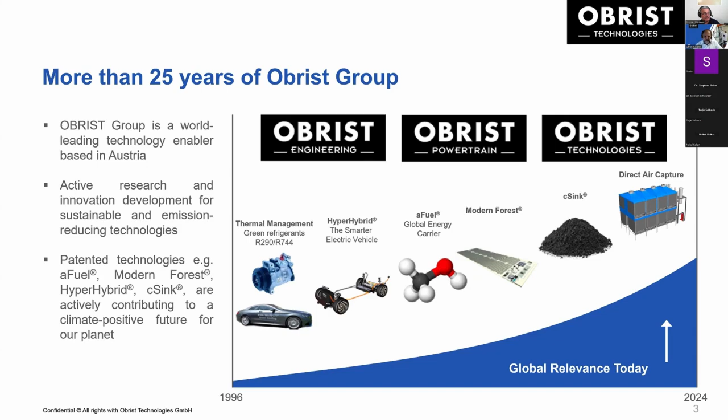There are, of course, numerous activities from the UN and all over the world in different countries to reduce or to get to a CO2 neutral level by 2050. And this will be an extreme effort for everybody around the world. We as Obrist think that this is actually not enough and we have to go further. And we have even to reduce the concentration of CO2 in the atmosphere by or after 2050.

The following technology, which is direct air capture, which this webinar is all about, is one of the building blocks where we think we can reach that ambitious goal. And I'm happy to hand over to Chris Meusberger to explain to you how we want to do that.

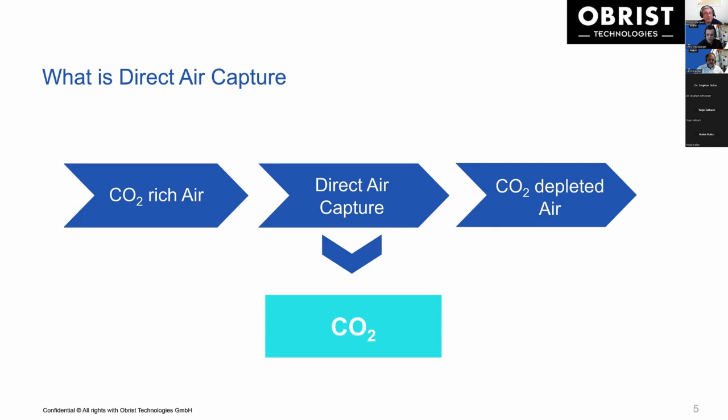To solve this challenge, there are, of course, multiple approaches, with each and every one of them having their own strengths and weaknesses. The most common classifications are through the type of process being used, as well as how the CO2 is released from the process. One can differentiate, for example, between chemisorption and physisorption processes, or adsorption and absorption. Process type also sometimes refers to the type of sorption material being used, for example, a liquid material versus a solid one.

With regards to the release of CO2, one can release this from the used sorbent material through different ways as well, depending on the process. For example, through heating up the sorbent material, which would be called a temperature swing, or creating a vacuum around the sorbent, which is equivalently called a pressure swing.

Finally, other aspects such as the application of the CO2 product, so whether the CO2 is used in a product or stored subsequently, further the condition of the CO2, especially regarding purity and/or water content, and then finally also the type of energy being used, so thermal or electrical energy. All of these are also sometimes mentioned to differentiate between various direct air capture technologies.

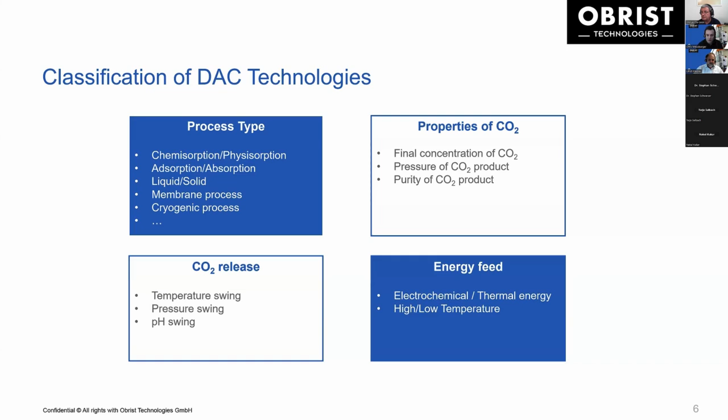Now, I do want to talk a little bit about several criteria that can and also should be used to assess technologies and their viability, potentially for different use cases. Before I go into further detail here, I want to point out one very important thing. Direct air capture takes up energy, and not that little.

Even though the theoretical value for the energy that is needed is quite low at around 140 kilowatt hours per ton of captured CO2, the reality is that most processes in direct air capture lie way above that measure, with 2,000 to 3,000 kilowatt hours per ton being quite typical, sometimes even more than that.

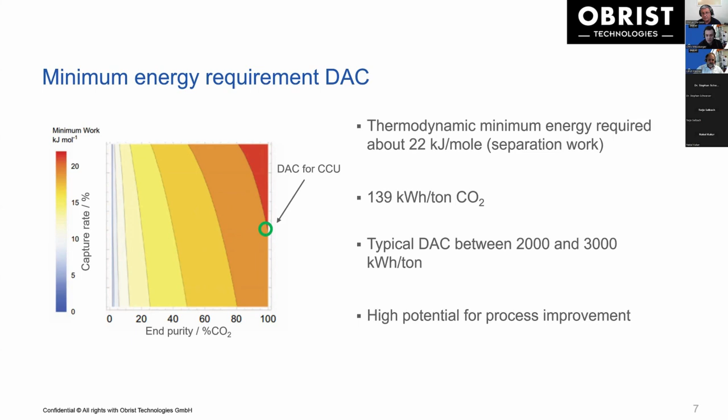Because direct air capture typically needs such a high amount of energy, it is important to consider the most cost-effective possible energy sources in the world that are also green and renewable, of course. Luckily, the cheapest primary energy source in the world is photovoltaics, specifically deployed in the solar belt of the Earth. And in order to be able to leverage this energy source, the DAC technology has to hold up in the unique conditions presented by those regions.

In that context, it makes a lot of sense that our criteria for good direct air capture are very much focused around that condition. Things like water retention, stability towards hot ambient conditions, and so on become very important in the context of operating in the solar belt, where the air is dry and hot. Of course, that is not all.

We believe that a DAC technology that needs to be deployed on a gigaton scale needs to tick other boxes as well, such as, of course, general affordability and being able to be endlessly scalable and deployable. These are the criteria we had in mind when looking for and developing a solution. And what we came up with is a technology that we believe meets all of them.

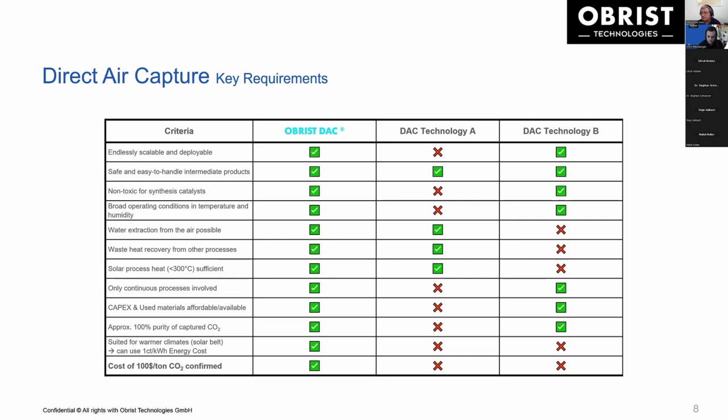With all that in mind, I want to now hand over to my colleague Johannes to tell you about our proprietary Obrist DAC technology.

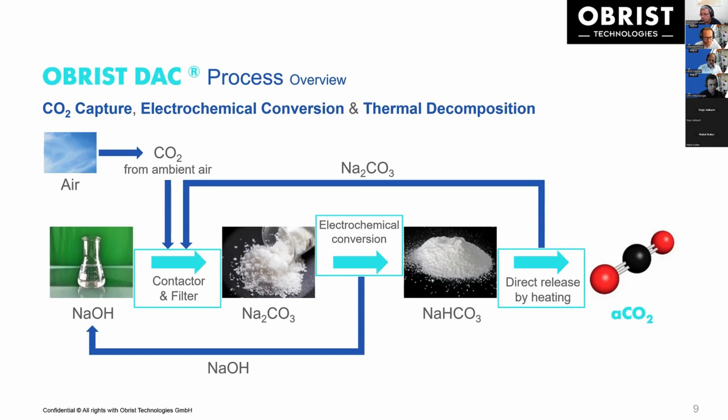In the next slide, I want to talk about it in a bit more detail. It looks a bit complex at first, but let's go through it. This is basically the same slide as we had before in a bit more detail. So here on the left side, it can be seen that the sodium hydroxide solution is circulated and brought in contact with the air. A solid is formed inside the tank. The solid has to be separated and can be collected outside, and is then brought into the second step.

Here a bit more specific. This is an electrolysis cell here. And the most important, we have a very diverse audience here, so if it's too much detail, please apologize. This cell does basically three things. On the one hand, hydrogen is produced. On the other hand, the sodium hydroxide is recovered to be brought back into the first step. And thirdly, the sodium carbonate is converted into sodium bicarbonate.

What's the important takeaway here is that this process is quite similar to the chloralkali process. Why is this important? Because as you remember, sodium hydroxide is among the 5 most produced industry chemicals in the world, and this chemical is produced mainly via the chloralkali process. And this also means this process is already at a very, very high TRL and already available at large scale.

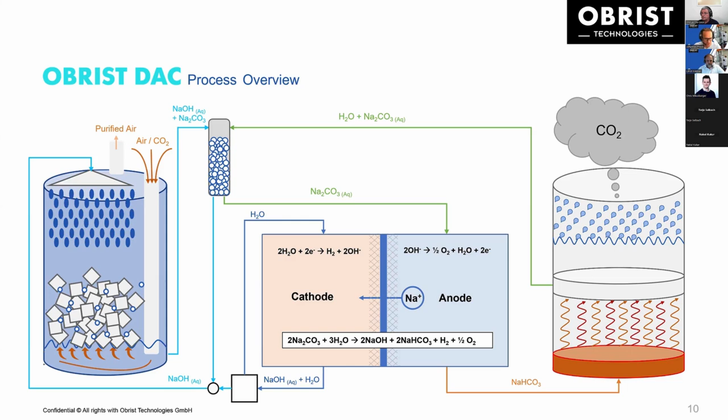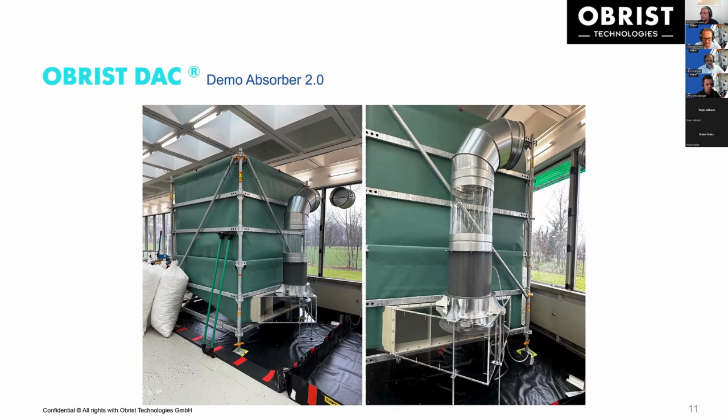So please, the next slide, Chris. Here to see a bit how it looks. We built several prototypes. This is one prototype of the first stage of our process we made in Lindau in Germany at Lake Constance. It was under construction. This is our second prototype, and in this case, we wanted to show that in principle, one could use very cheap materials for this step. We don't need high-tech tanks or whatsoever for this.

Okay, and in the next slide, I want to talk about the energy consumption. As Chris already mentioned, we had a bit of a different approach in our process. We did not want to be the best in terms of energy per ton CO2 captured, but we were planning to be the best in energy cost, also in terms of energy cost per ton of CO2 captured that can be used for methanol synthesis.

We need energy up to maybe 100, 150 degrees Celsius. And these are temperatures that can be reached either via solar thermal power, or even better, if you have a methanol plant next to it, this can be covered by waste heat.

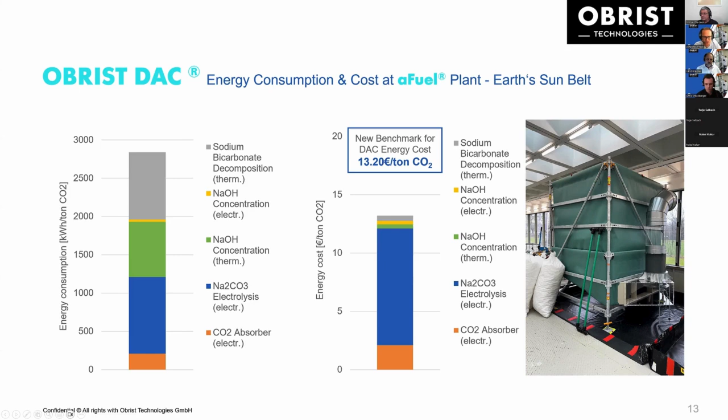Okay, so these were the most important parts from my side. So Chris, I think I will hand over to you again. Yes, thank you, Hannes, for this overview.

I just want to give a quick word on what we actually want to do with direct air capture and our own direct air capture, and why we do things as we do them. In short, we want to create an energy carrier, specifically methanol, produced in a climate positive way, which we call aFuel. Direct air capture, of course, plays a crucial role, since with aFuel, we do not only want to reach CO2 neutrality, but even CO2 negativity.

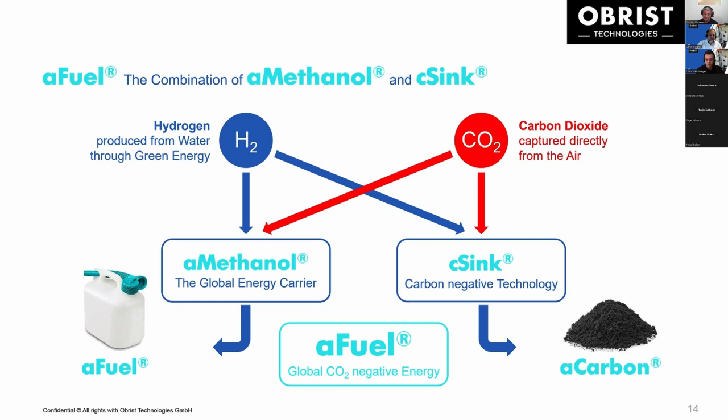So we actually want to take out more CO2 from the air than what is emitted from using the aFuel. We do this by including an active carbon sink process into the mix. For this reason alone, it is vital to be able to effectively capture the CO2 not only from point sources, but directly from the atmosphere as well, and also in an affordable manner.

The resulting methanol is the energy carrier that for us poses the ideal sweet spot between ease of production and ease of use. With it being liquid under standard conditions, it is easily transported using existing infrastructure, whether that is via pipelines, tanker ships, or fuel stations, and also used in a wide variety of applications that use fossil energy today. One quick word here, we believe that this energy carrier has applications that go way beyond our original industry of automotive, where we're coming from.

Indeed, all forms of mobility can directly or indirectly be served by aFuel, but also other major energy consumers of today, such as all kinds of industry, thermal power plants, residential users, could be supplied with aFuel. Finally, of course, the chemical industry, which is the main consumer of methanol today, already provides a mature and existing market for the products.

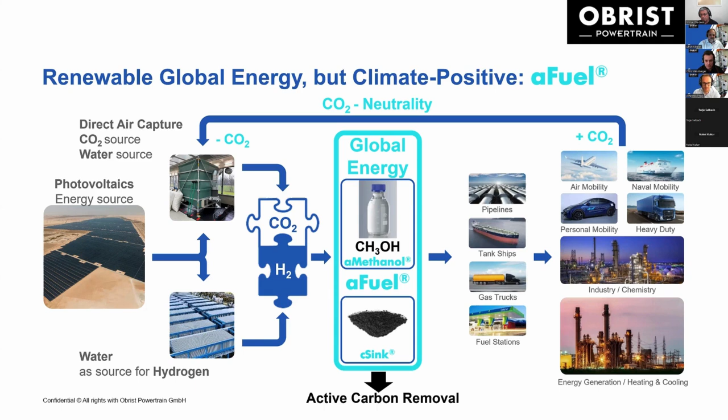So, what exactly are our plans? Well, here you can see basically our end goal, which is the construction of so-called gigaplants in the solar belt for the large-scale industrial production of climate-positive aFuel. These plants are designed to be energy autonomous and perfectly leverage the abundant solar energy in the sunbelt of the Earth.

Of course, there are a few steps that are coming before that, with multiple intermediate projects underway that will be paving our way towards the gigaplants. We will give updates on these next steps in due course. And so I hope you keep your eyes open for news on our coming activities.

For now, this brings us to the end of the presentation. I want to say thank you very, very much for your attention. Yeah, I think we have covered quite a lot. Your questions show that you are obviously interested, and we are, of course, totally convinced that we have an extremely interesting technology on hand to really tackle that problem, which I introduced at the beginning.